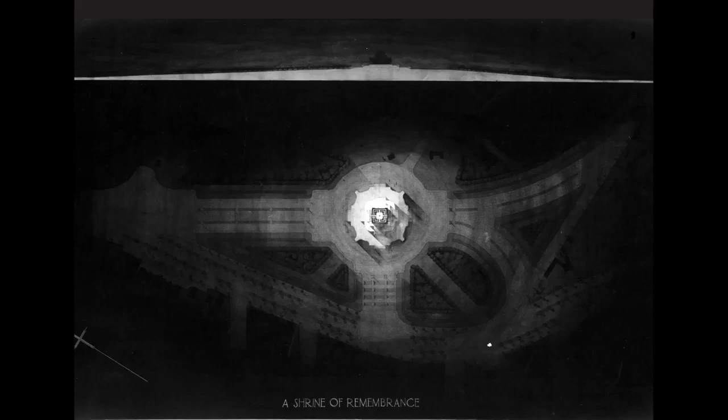Obviously, as a practice, I'm here representing a creative partnership with my partner Catherine Rush, and the collective efforts of, I've lost count, probably 60 or 70 creative individuals from right around Australia and elsewhere who have contributed to our work. Our main focus has been in the civic domain, so we don't do a lot of developer stuff. We've tried to do greenfields residential with developers and got beautifully sacked about a week ago, so not always our cup of tea. An interesting case of trying to find where your skills and expertise really lie and not trying to overstretch into areas which are a bit hard to find interesting, so a bit of a lesson for us there.

The shrine has a really fantastic design history. It was a project that a lot of people never actually wanted. It was won in competition after an initial public debate about what to do to memorialise the incredible loss that Victoria had in the First World War. And it was Sir John Monash, the great engineer, general and polymath, that was involved in supporting the competition and ultimately selecting the site on St Kilda Road. We'll talk a bit more about Monash later, but for architects and landscape architects, Monash is a fantastic figure.

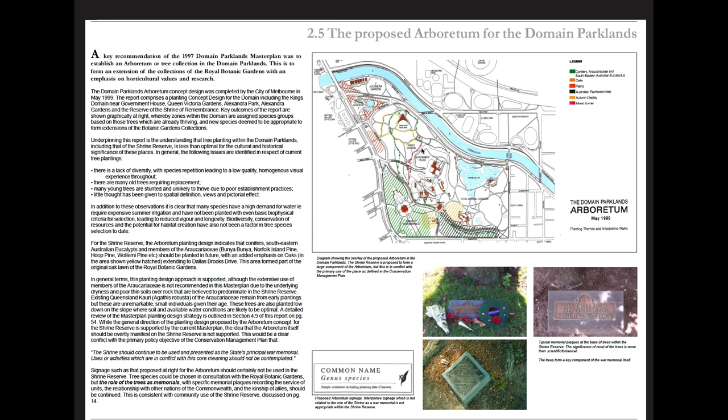Our practice was engaged with Ashton Raggatt McDougall to really work out what to do. There had been a scheme by Eggleston MacDonald to provide accommodation under the shrine building in the abandoned Undercroft, but that had not gone ahead. From a landscape point of view, the reserve had been managed essentially as an arboretum and had kind of crept into the Melbourne City Council management domain, and it was starting to move away from this great tradition of the shrine as a special place in Melbourne's civic fabric.

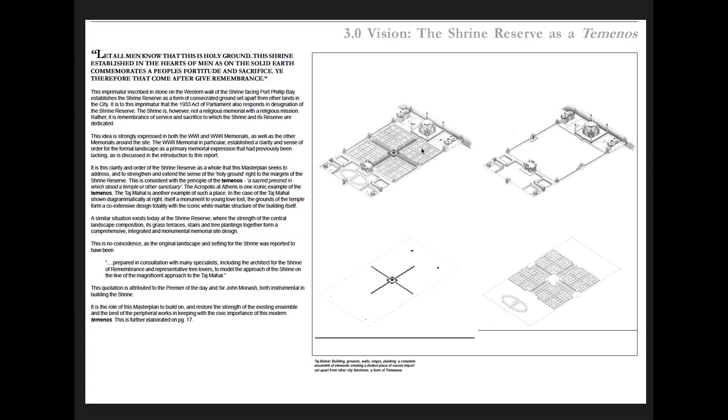That's the Sir John Monash quotation, which is inscribed in very large letters on the western wall of the shrine. So I guess working with ARM, we started to look again at the shrine and how it could be re-established within the parklands of the domain with its 11 hectare reserve. We started to think about this idea of the shrine as a form of temenos, a completely constructed world, not just a building, but all of the elements that go together to make up a kind of sacred parkland, I guess. Correct me if I'm wrong on the use of the word temenos.

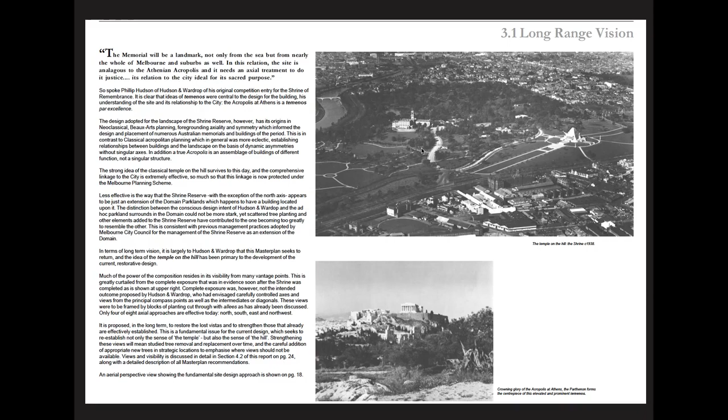And returning to this idea about the temple on the hill that was described in the early ambition of those who really founded the place, and also Hudson and Wardrop's ideas for how the shrine might sit in the city. A lot of that was really about decluttering, taking things away, and editing the tree population, 450 old and strange trees which needed management again. I think if we recall that Hudson and Wardrop drawing, it was much more around a formal, almost classical, perhaps City Beautiful approach to civic placemaking.

So we started to think again about how we could re-establish this axial landscape carved out of forests, very much in the manner of perhaps Vaux-le-Vicomte with its grandiose alleys. But that is really the essence of what we found on the site. So we started to look. I hope you can see this is right. This is an interesting review of 15 years of design representation as well. So this is one of our rather odd marker drawings of 2001, I think. It just shows some of these ideas about clearing out the alleys.

Is there a pointer? Perhaps not.

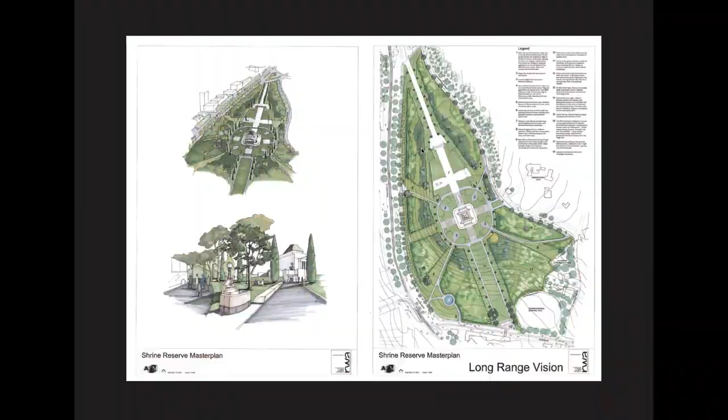Clearing out this cluttered classical framework to reveal the shrine again in an ordered, forested world. And this is all built on, I guess, slightly romantic ideas about Greece and Turkey and how we might re-establish this vision for this building. And then looking from a landscape design point of view at planting design, as we saw it, for this dry constructed ridge. So trying to analyse what was there, and this is I guess a process we invented at the time to look at, understand, and analyse this tree population on the site.

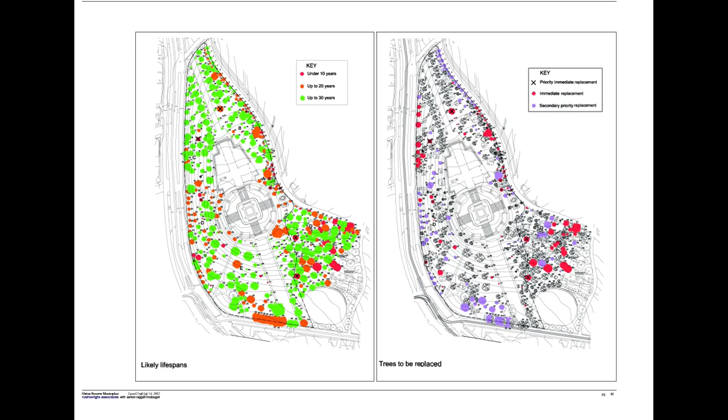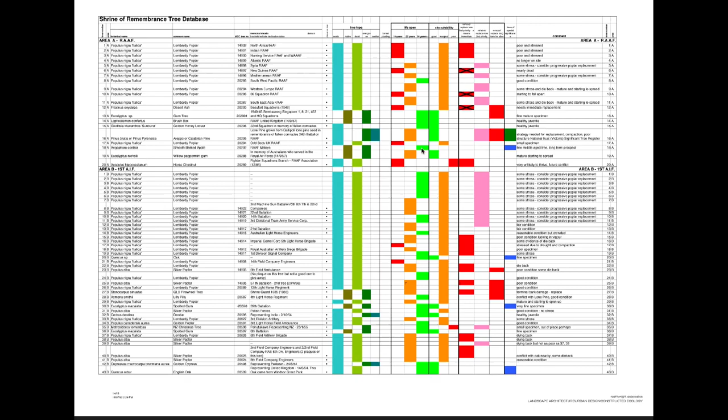So we had some basic categories to try to begin to understand these trees as a group, and then to recommend how it might end up being adjusted. And then also to look at how, with age, mismanagement, poor tree selection, and obviously climate change, what was likely to happen in the future. And at that time we found that 40% of the trees were likely to go in 10 or 15 years, and that's pretty much what's happened on the site today. So this went through this crazy Excel sieve analysis, and we'll return to the outcomes of this work a bit later on.

I think a key principle in this landscape is this idea of memorialisation. Every tree had its plaque for every unit associated with the place, and these trees become the focus for gatherings year in, year out, and it's actually this link between particular trees on the Shrine Reserve and these groups of people that brings people back year after year.

So we developed this planting mix, really pine, eucalyptus, cypress and oak, these great long-lived kind of dry survivor trees from the Mediterranean and elsewhere that would continue a lot of the design language that was already on the site and then develop a really long-lived tree population in perpetuity.

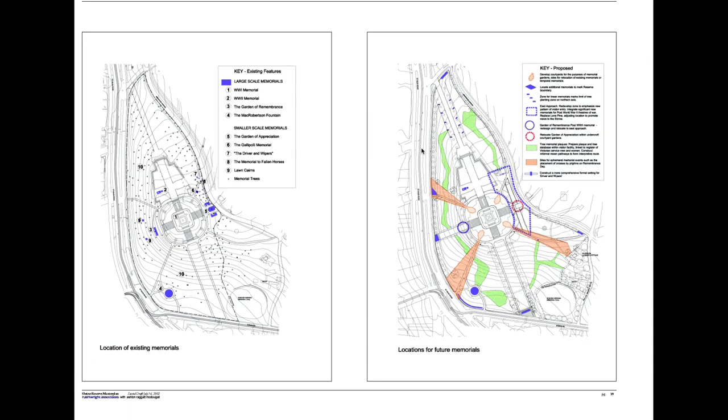Much of this work also looked at memorials. Like many sort of parkland landscapes, the place just sort of accretes stuff. People want to give stuff, donate stuff, locate things on the reserve. So there was a little bit of focus on how that might happen in the future as well, which informed the placement of other objects over the last decade or so.

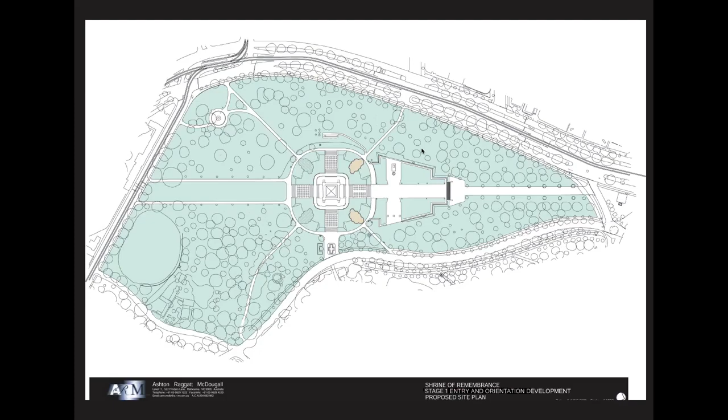I guess the main area of interest for us has been the development of the 4 courtyards on the site, where we've played a greater or lesser role. These, I guess, are the masterstroke on the site, if you will, developed by Ashton Raggatt McDougall, essentially as a response to the requirements for universal access, which we'll see.

So in 2001, it was pretty much impossible for a very ageing population of returned service people to actually get into the crypt and the sanctuary of the shrine, and that was actually almost the primary briefing criterion for what became the new visitor centre, as well as providing accommodation under the building.

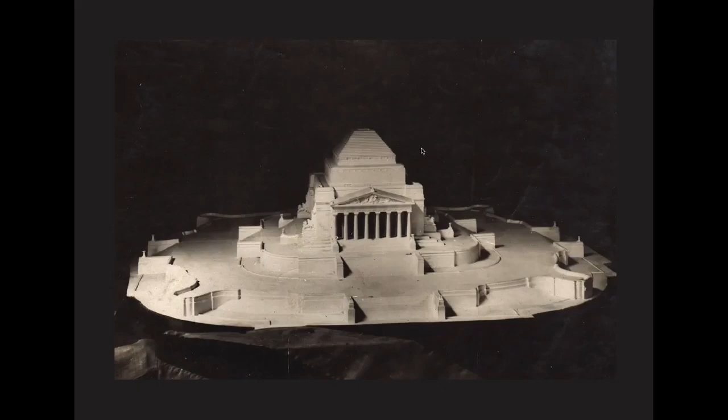So the design master planners, Neil Masterton, Ian McDougall, obviously Howard, and Tim Wright of ARM, looking again at the Hudson and Wardrop schemes, developed an approach to this building to some degree based on the original conception of Hudson and Wardrop. So in these model images of the time, you see that there's a second terrace of masonry below that upper rise, which is built on the site. And this is all sort of grassed over now.

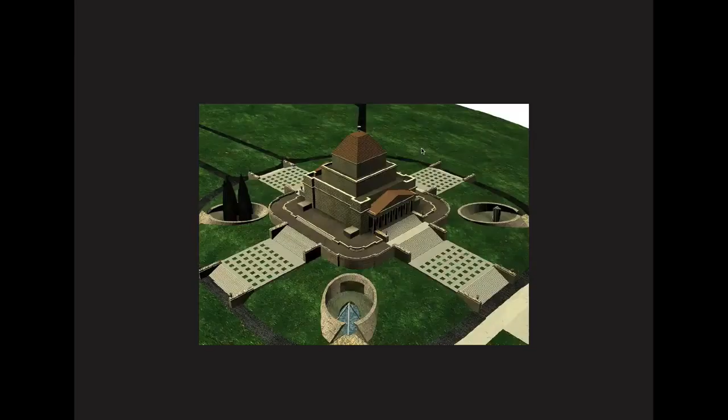So this became, I guess, a way into starting to think about a way into this building and to use the very extensive undercroft, which is the forest of columns, which I imagine some have already been to today. Opened just last November in its second stage. So this is an ARM scheme or something that didn't happen. I think we're probably fortunate it didn't happen.

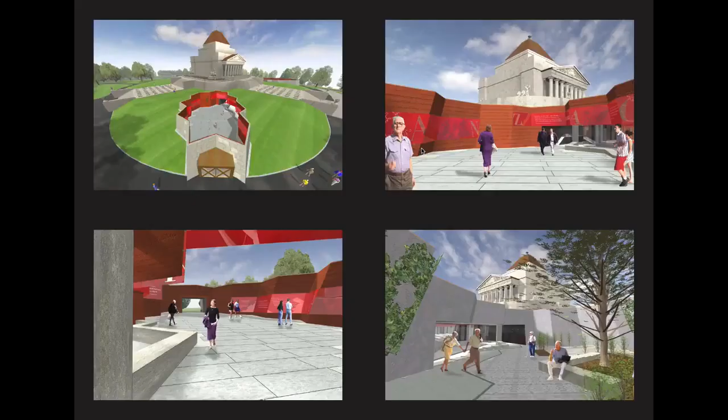These are some of the early studies of that period with ideas and tests for those courtyard interiors. And this one also talks a little bit about the courtyards as a kind of section of tube which spirals up Swanston Street.

And obviously, I think the key move is this idea about a very gentle 1 in 20 incline. I think just in their section there you can see east and west, that incline down into the undercroft space. So the light brown is the courtyards, obviously, and then the yellow is the accommodation, admin, office, visitor centre, and then the disabled access to the crypt.

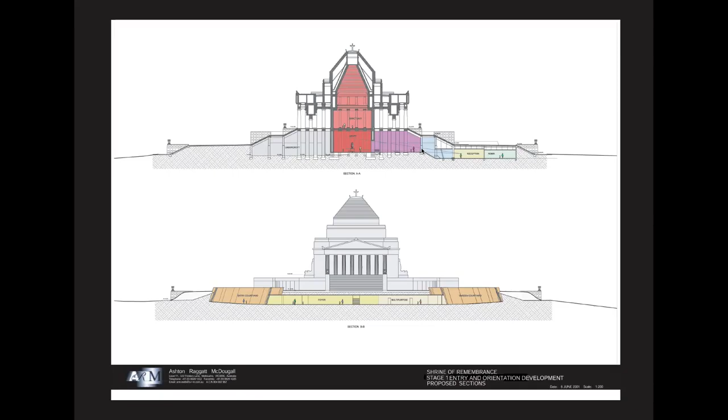So that apparently simple move, I guess, cracked the nut in this particular case. These courtyard forms are faceted and to be executed in precast and in situ concrete. And you can see there providing that graded access down into the undercroft. And on that drawing you can see the column field, which has just recently been fitted out for exhibition display, back of house and admin.

This all seemed very challenging at the time. So Ian, just after a media launch, convincing the trustees of what was about to happen. You can obviously see the look on some of their faces, being a bit worried about perhaps the scale and enormity of the change that was about to happen to a building which hadn't really been adjusted since 1934. But obviously a brilliant sort of esquisse and partie for the entry to the building.

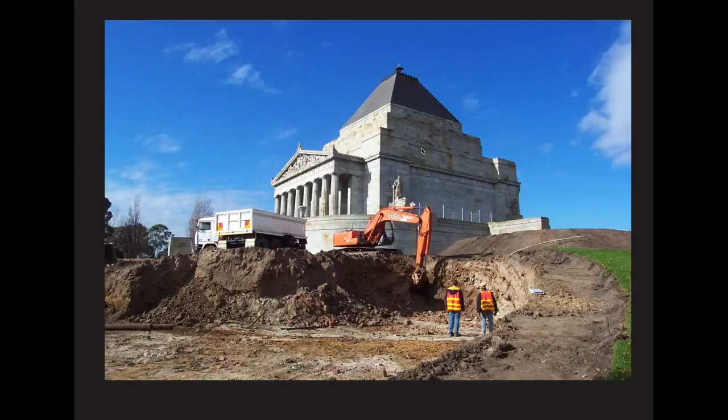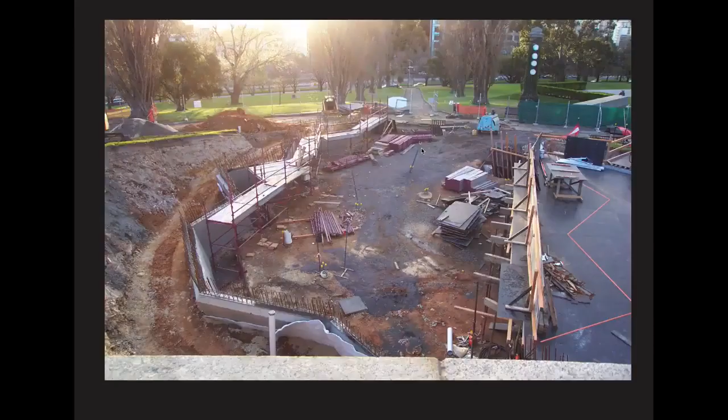And obviously some very major adjustments happened along the way. Kind of industrial scale archaeology happened, revealing huge areas of uncontrolled fill, contaminated fill, and the full range of construction problems of the time. So these are images of that construction sequence and the northwest courtyard coming out of the ground. That accommodation below a propped stair, and then the access out to the right-hand side of that slide, out to the courtyard entry.

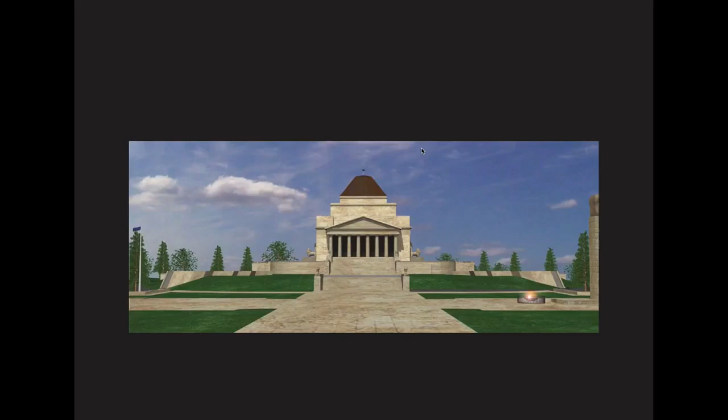I think this was perhaps only possible because of the order and simplicity of this front elevation, which I think is quite brilliant. Those folded walls at once buttressing and stabilising the building in the landscape, and then providing this completely respectful granite frame, I suppose, for the walls within, and these different courtyard worlds that have emerged on the site.

The landscape development of the courtyards, I guess, began with an approach to the building as the World War I memorial. So we started to think about what was involved in the Gallipoli landings, the landscape colours, the sense of what was there in the landscape, and then also ideas about the bunkers, what it was like to be below grade, and how you might be able to create something for today which had a sense of antiquity about it, and a sense of being able to age. So these are some of the images of that period in the design process.

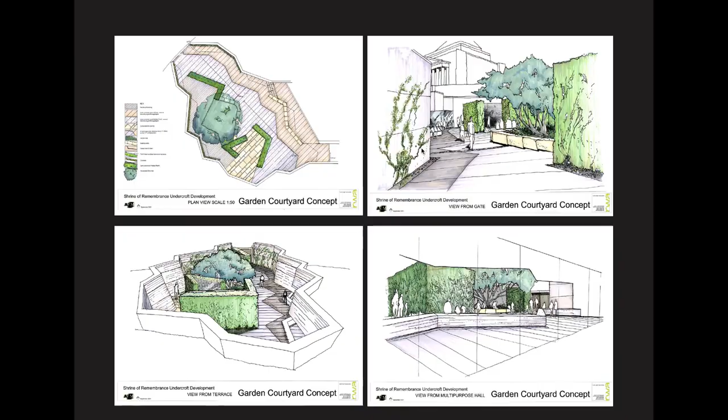These are some of the sketch studies at the time, dealing with the need for a 1 in 20 loading bay, coming down through the body of the courtyard and into the doorway there, and the big tree on the right. Construction drawing showing this central space, and these fragments and shards of landscape material. I guess a plan of considerable energy, and the line on the north side there, a line created out of the shadow of the northern wall on the 11th of November at 11 a.m., the day that the armistice was signed.

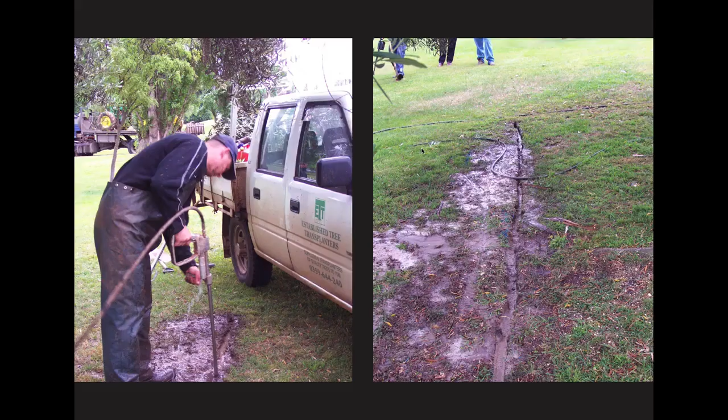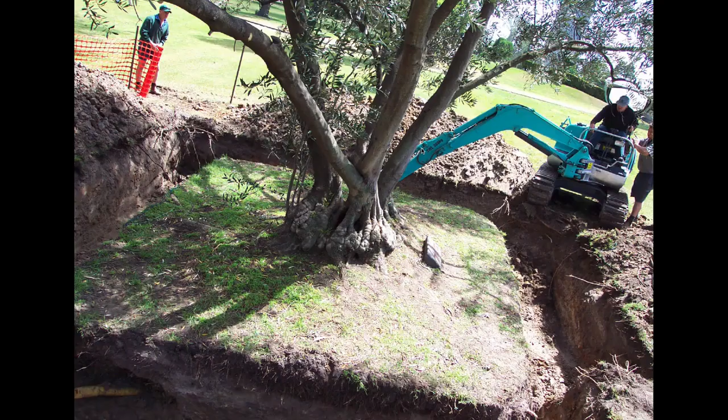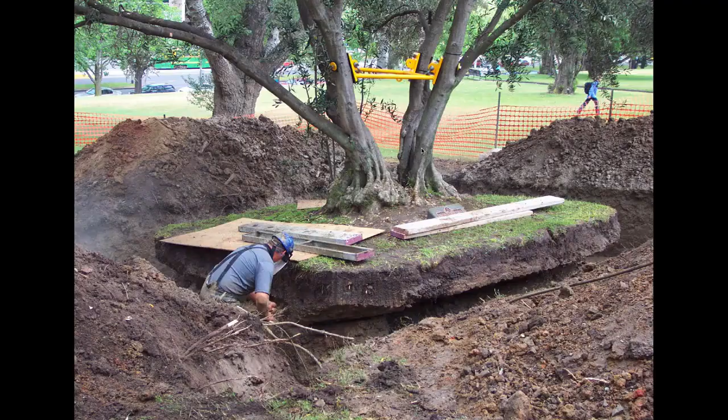And then we looked at moving this big olive tree, which is always great fun. These slides, for those who are interested, show some of the work involved in doing that. It was a 5 by 6 metre root ball, then water jet cutting in on two sides at 6 monthly intervals, so that the roots had a chance to grow back, and then trenching around it to create this fibrous root ball. The trunk was then bolted together with a custom-made steel frame, so through each of the trunks we bolted through to get a lifting attachment, and then it was undercut progressively and eased out of the ground from above with a hydraulic crane.

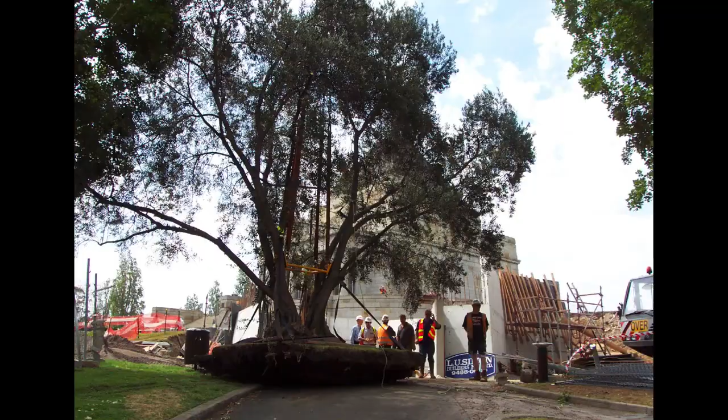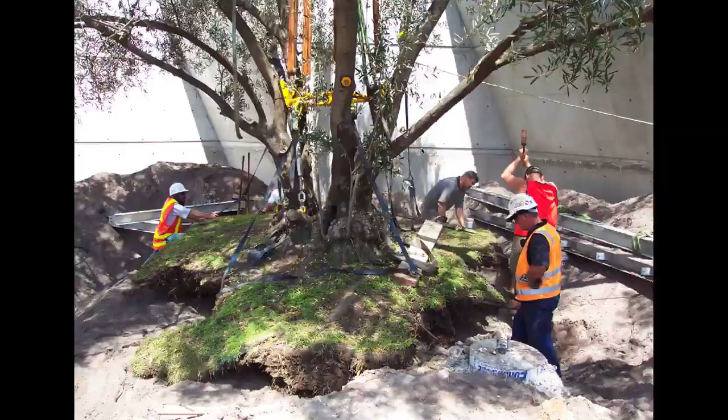And there we see a classic demonstration of the lack of taproots of trees for those who are technically minded. Most trees don't occupy much more than about the top 500 mil of soil, and this was especially true on this site where the council have been watering since about 1973 for 15 minutes every night. So it was a bit of a surprise to see this root ball come up with just 300 or 400 mil. A somewhat nerve-wracking and risky enterprise this was. As it was lifted, bits of the root ball started to peel away and drop off, much to the amusement of the 3 television news crews recording it all in minute detail. And there it is going in. A great way to start this project off.

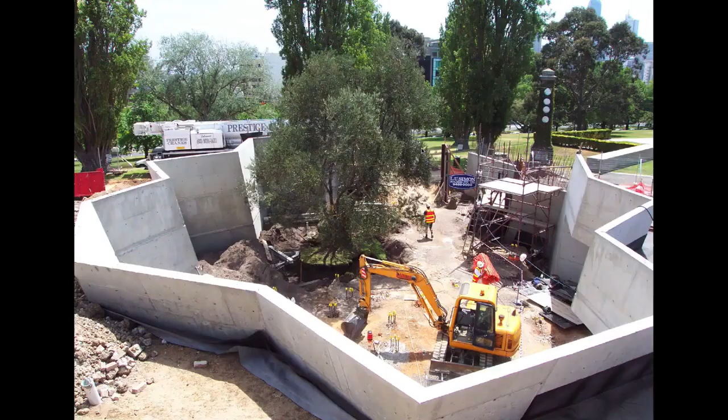Obviously a very imperfect tree, and we selected this tree primarily for its ability to transplant. They've been transplanted like this for thousands of years, and will grow for hundreds of years thereafter. There are olive trees in Europe and North Africa known to be thousands of years old. And this one, you've seen in those images just how craggy and distressed, almost damaged, perhaps even blown up this was. So this gave us this fantastic initial character, and chimed in perfectly with an aesthetic around remembrance, longevity, age, dealing with Asia Minor, the plants of the Dardanelles. All these things came together in this olive tree, if you believe the story.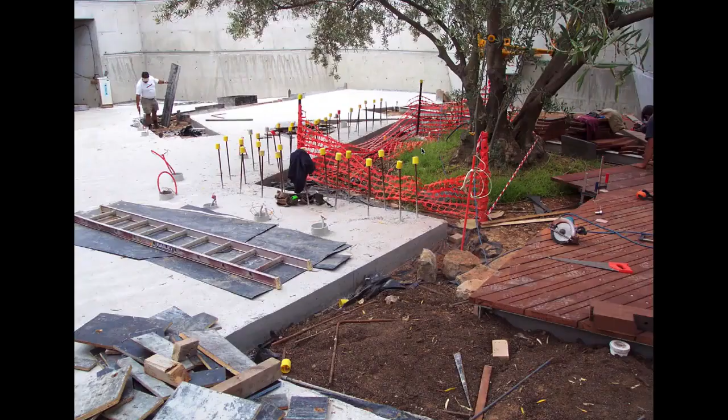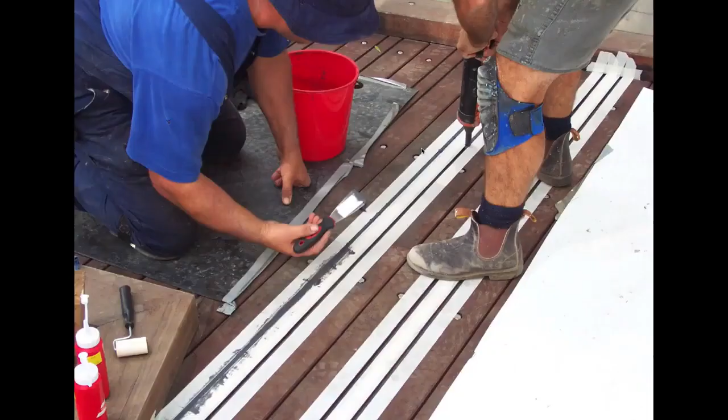Obviously, a big tree like that drives the technical issue of keeping a porous medium above the root ball. So this is all decked around. We designed this big timber wharf deck, really. Drove the builders completely crazy doing this. We've used this again since. It's a routed carborundum strip, 10 by 10, routed in to give us slip resistance, so those black lines going across, and then countersunk stainless steel coach screws at 600 centres doubled up, so you end up with something like 8,000 coach screws in each deck. That certainly keeps the carpenters busy, a lot of hand labour, but you end up with this fantastic surface of intricate crafted detail, a long way away from those bugle screws and all that stuff you inevitably see in decking, from which the decking inevitably seems to craze away. So this was an idea about a maritime wharf deck, and then just some snaps of the concrete formwork.

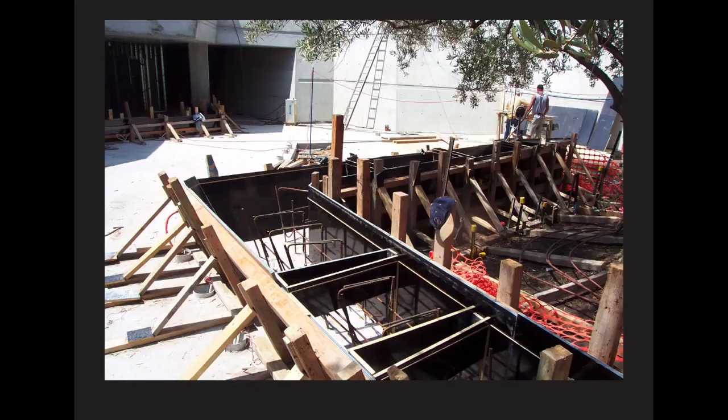Another risk here in just keeping the tree alive through construction. Some of our rebates and set downs in that concrete are all, I guess, consciously designed around firing lines, revetments, military items and the like.

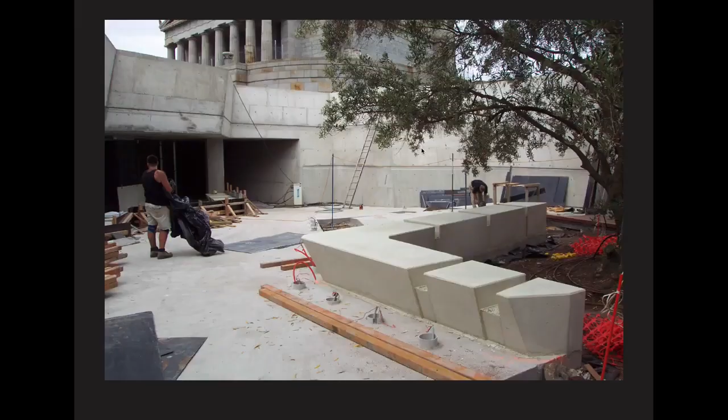And also, I guess, in the back of our mind, the idea about a ruin, and again, some thoughts around, this is actually one of the theatres at Priene in Asia Minor, this giant-sized marbles and ruins of Europe. And just some snaps of trees going. I thought it might be instructive just to look at sort of growth over time.

I think, as you'll see, perhaps one thing that differentiates landscape architecture from architecture is this thing that it improves with age. And I think from a practice point of view, it's something that we've thought about quite a lot. Will what you put in actually improve, or will it kind of fade and get really ugly and scratched and horrible? And maybe that's what differentiates, at sort of a primary level, the difference between landscape and architecture.

I'm not sure. I think architecture is installed; occasionally, it weathers gracefully. Does it improve with time? Is really open to question. It's always interesting to see the heroic architectural photo. It's taken the moment the dust has been cleaned away from the pavements, and really the design intention doesn't really come to the fore until much later.

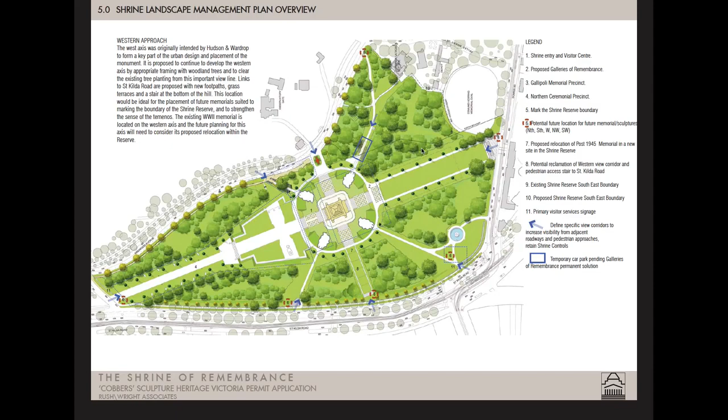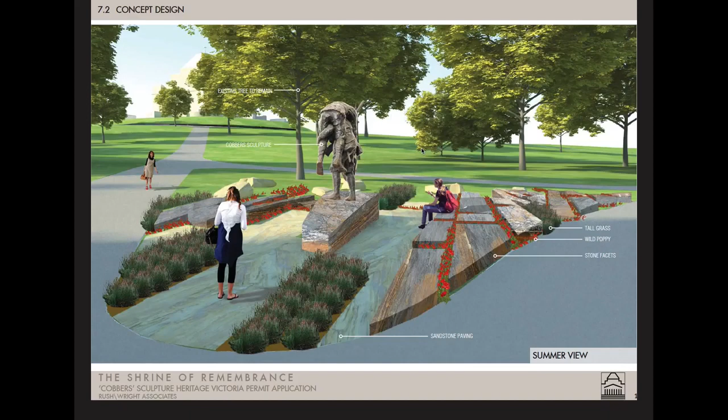This steps through now to about 2007-8. The master plan is kind of in full swing, and this scheme for the placement of Peter Corlett's Cobbers sculpture came across the drawing boards, and these are some early concept ideas for that. So the figure itself is the second casting of Peter Corlett's Cobbers sculpture, which was constructed in the Western Front in France to commemorate the Battle of Fromelles in July 1916.

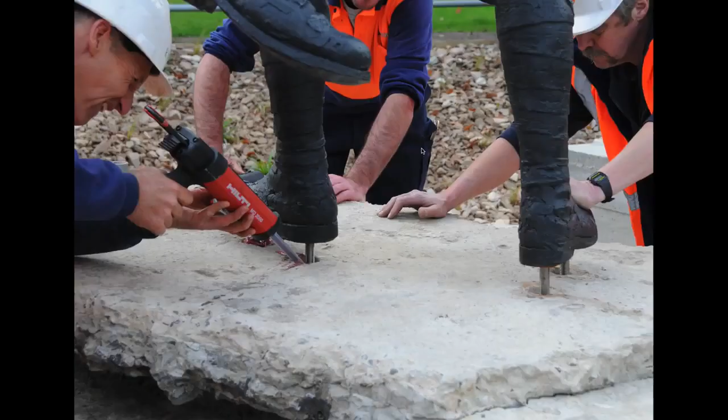Later, we actually selected these from the West Melbourne Power Station site on Spencer Street that was being demolished. Found that there were these fantastic floor slabs available, and had them brought down by Guilfoyles, the wreckers, onto the site. And interestingly enough, we later found out that it was Sir John Monash's office who had specified this concrete. So here we have a kind of recovered relic of a Monash scheme brought down and used on the Shrine Reserve. So pretty interesting to find that out.

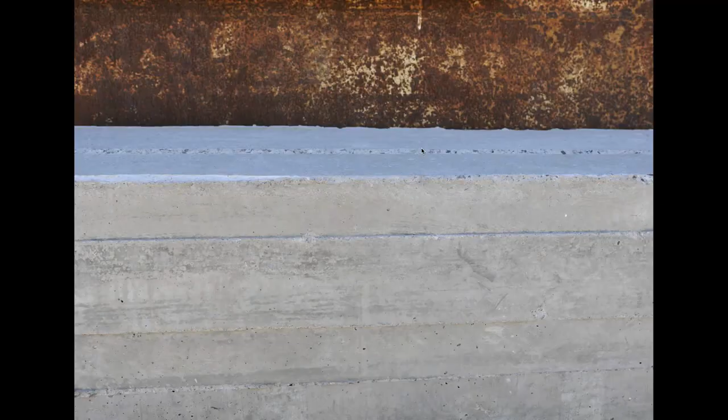Some of the details and signage, which we'll touch on a bit later. This is sort of interesting in this sign, but it recurs in one of the later courtyards. This idea around using recovered materials: it's actually just a giant piece of road plate. You might see these in excavations in the road, and this sign was actually just created from the recovery of one of those pre-rusted forms and cantilevered off this beton brut sort of foundation course, through to 2009 there.

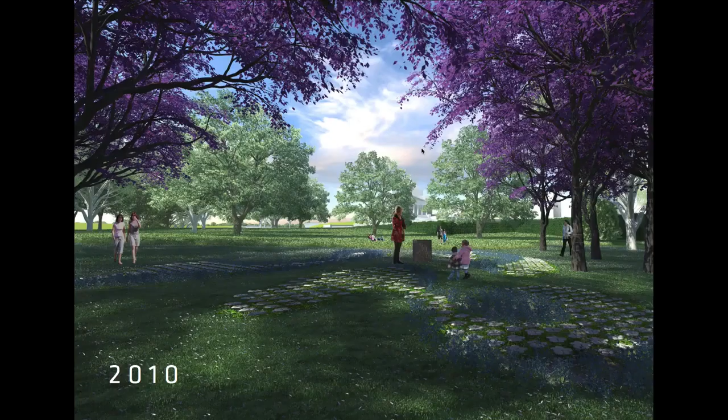Around this time, we were also involved in helping Catherine Rickaris, landscape architect, to visualise the Women's Service Memorial on the Shrine Reserve, and these are just some renders of that. A kind of step forward into a different form of representation, and a crazily high-res render. And by now, these are actually individual blades of grass. I think there's something like 5 million in a scene. So we're very happy with this, with the colour and light rendition. And a really interesting moment in terms of design representation where 10 years on, so much had changed in terms of design practice right through the industry.

More on memorials, just a little bit of a look at the Gallipoli Memorial. Again, forming part of that idea around making the edge of the reserve.

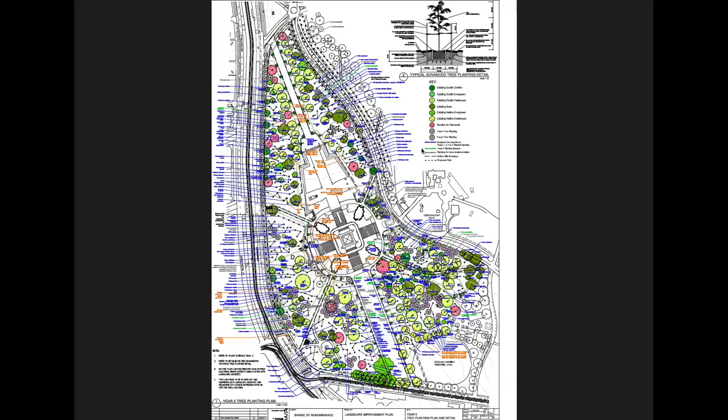And then looking at the trees, by about 2009, Melbourne had its worst drought for a very long time, and the population of trees on the reserve had definitely started to show its age. And at about then, we began the process of really closely assessing what to do, and this has been a process of a yearly assessment on site, and then working with the original ideas of the master plan to replant the reserve comprehensively with that original conception of the species mix of cypress, eucalyptus, oak and pine as a kind of backbone planting. So you can see all the little dots on the drawing, the new trees year by year, and it gives you an indication of the way in which one of these old tree populations just needs refreshment, a bit like a crop. They're there today, but eventually they'll be gone.

So we try to look at the way in which time will influence a big tree population like this. And to be honest, getting these trees refreshed has been one of the most satisfying parts of this particular project, and working out ways to group and get these things going. It sounds like a kind of simple victory, but the levels of bureaucracy involved are challenging, and all the establishment practices needed in these old compacted grasslands have required a lot of scrutiny. And fantastic, we're now starting to see things like stone pines and these fantastic old cedars and oaks and so forth, which are going to grow out to form a new kind of urban forest.

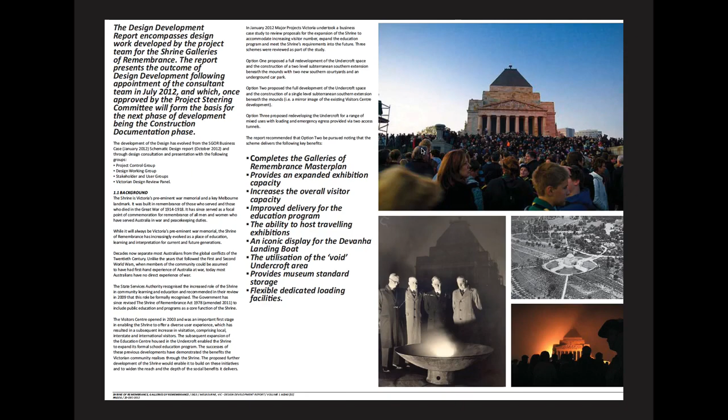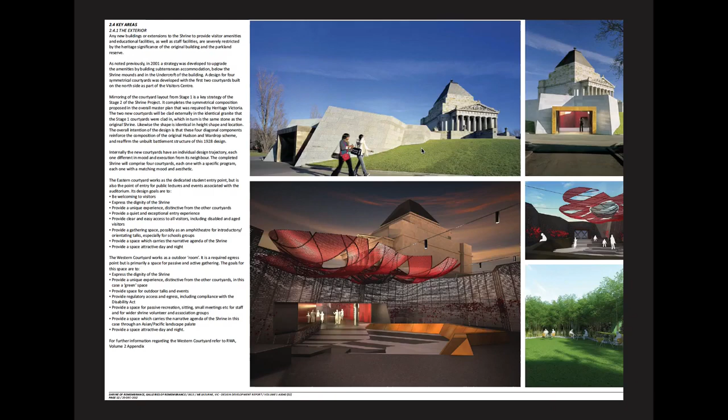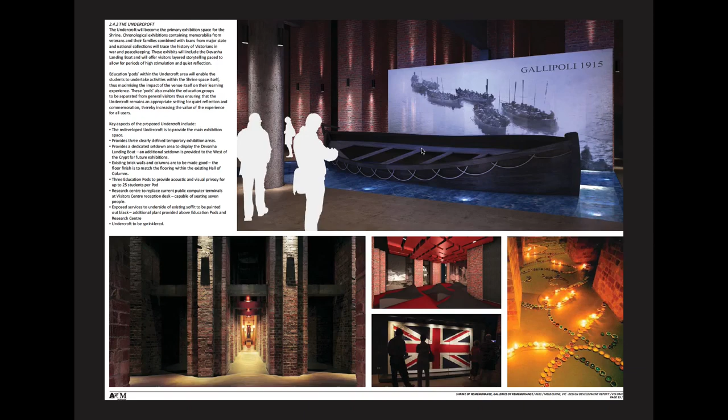Stepping forward to the recent stage 2 component of the work at the Shrine courtyards. These are some recent slides about that, which has really been the addition of 2 courtyards on the south and the major galleries development, which has brought exhibition and display to the Shrine in a way that hasn't been there previously. So there are real highlights in these galleries, including the Gallipoli boat. It's one of the original landing boats, which has been brought into the Undercroft zone, and it is quite an incredible display of these World War I artefacts.

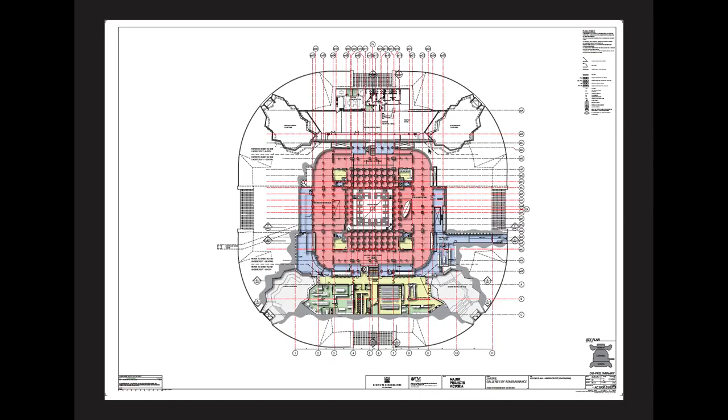And the courtyards again, ultimately, I think it was a condition of the original heritage permit that the scheme would end up being symmetrical about each axis. So it was a very good permit to get because it meant that the second stage just had to happen at some point.

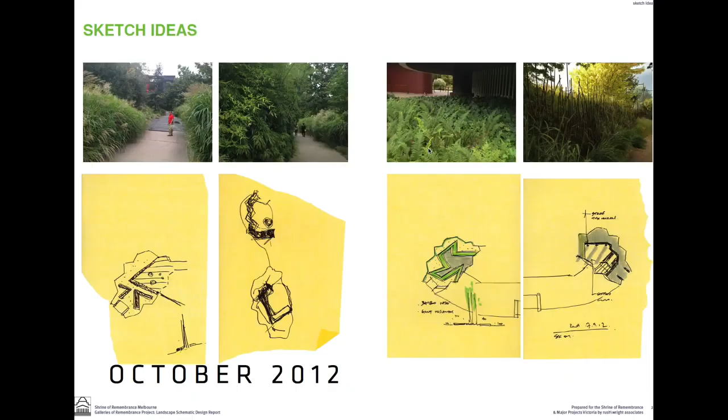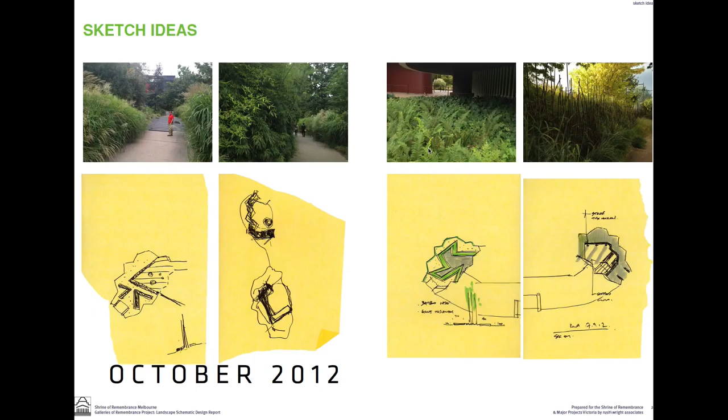And these are some early schemes for those 4 courtyards. The original idea for the courtyards was all different. On the northwest, we have the olive tree garden courtyard. On the northeast, that dramatic entry. On the southeast, a brief for a schools entry courtyard, and then on the southwest, more of a green staff retreat, and some hilarious cartoons of that time.

And working again with Ian McDougall, we were looking at some idea about how to represent the history and service of Australians in the Pacific. And movies like The Thin Red Line were definitely on our mind, with the sort of horrible kind of tropical savanna grasslands as a feature, and then the potential use of bamboo. So we've basically pursued this scheme for the southwest using those principles.

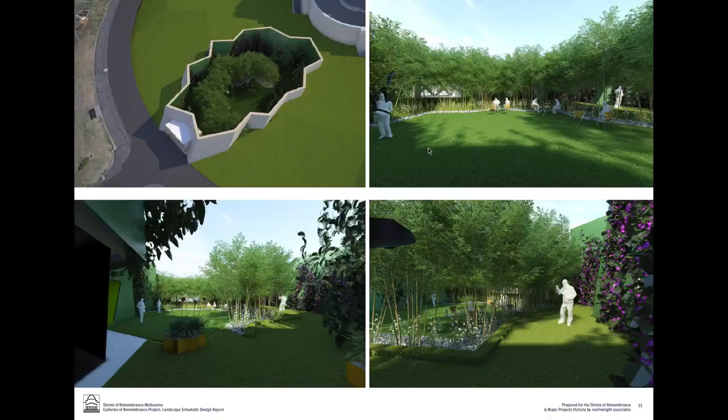And it became this, it just kept on trying to cover everything in grass for some reason. So we had this big green sward and this sort of strange, wild, woolly bamboo grass around the edge. There are a lot of ways to do that. Miscanthus sinensis giganteus, some of the other tropical bamboos, and had a really good look at the potential microclimate in there and how it might figure in the landscape there.

And unfortunately, not many people were happy with this scheme, and we were essentially asked to revisit it, which does happen from time to time. And we started to look at a new client brief, one using all natural materials and these principles established up there, and returning to some ideas that we'd explored to some degree in the northwest, and then looking at how we might begin to talk to the idea of the Pacific region as a battle zone, and started to work with these themes.

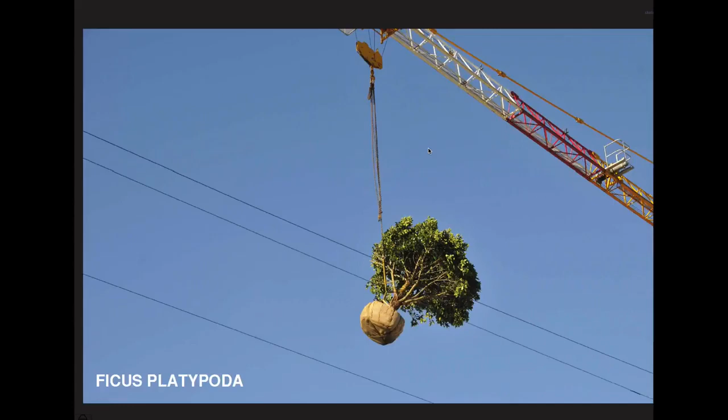Again, trying to look at a way in which a tree could form a primary design idea, and then the rest would follow from that. So these are, I guess, reference ideas from that period. Very strongly interested in this idea of a giant strangler fig, and then how we might actually achieve that in this courtyard.

So we actually end up finding a suitable tree in the nursery. So this is a Ficus platypoda, Port Jackson fig. Itself another kind of crazy remnant in a nursery. Have these fantastic double trunks and aerial roots and impossible branching habit, never to be used in any proper kind of street landscape or anything like that. So an ideal candidate for us, and this was later on installed in the project. And trying to bring in this idea of the tropics into this landscape proposal.

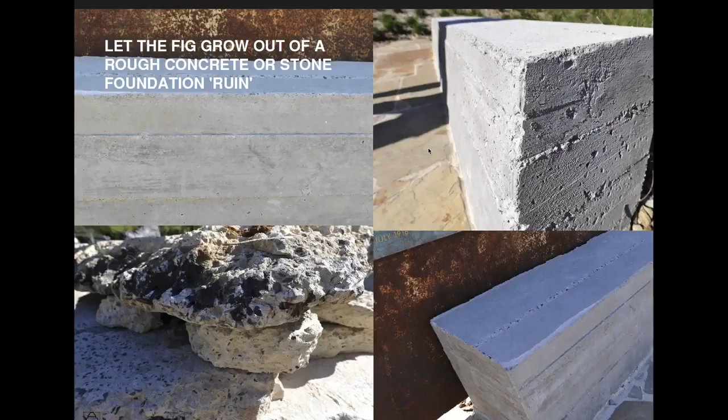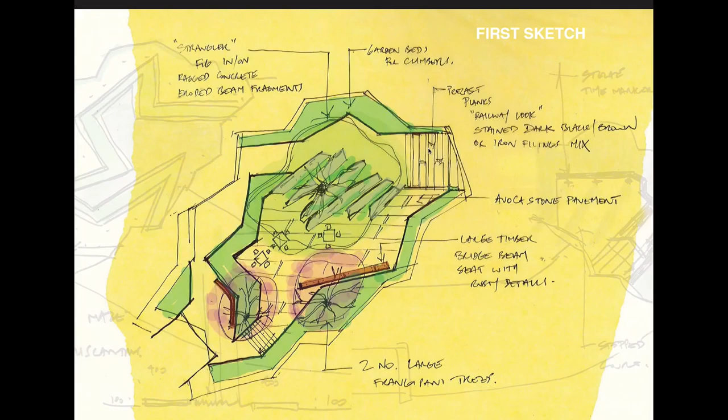And this was one of our very quick sketches, I guess, used to try and capture some of these ideas. So the planning is similar to the other courtyards. One large central open space, and then the need to come up at 1 in 21 around the back there. So that was a very common theme within these schemes.

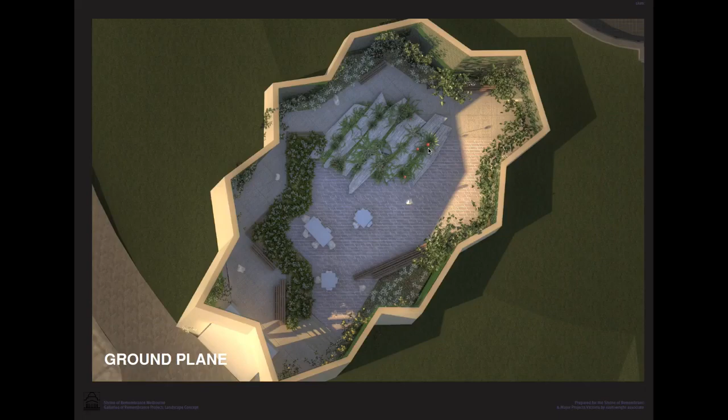And then some renders of the time, just trying to explore this idea again about placing the big tree in the courtyard, and then how to, I guess, work around it and integrate it. And in this case, almost suppress it. And here we see these large concrete plinth forms underneath, essentially designed to suppress the tree and try to keep it small, encourage aerial roots, and then the whole surrounded underneath with a 1,200 deep concrete wall. So we actually built this big concrete bucket.

The ground plane render. You can see here we're reprising these concrete plinth shapes with plants kind of coming up in between. Not quite sure where they came from, really. Possibly bunker foundations. The builders christened them the concrete coffins, which was interesting. And just the details for those. I think you can just see there at the top left, these really deep concrete restraint walls to try and restrain this tree, essentially turn it into a large bonsai.

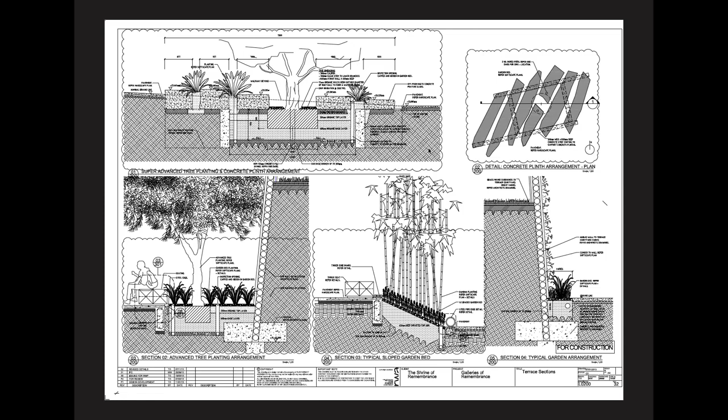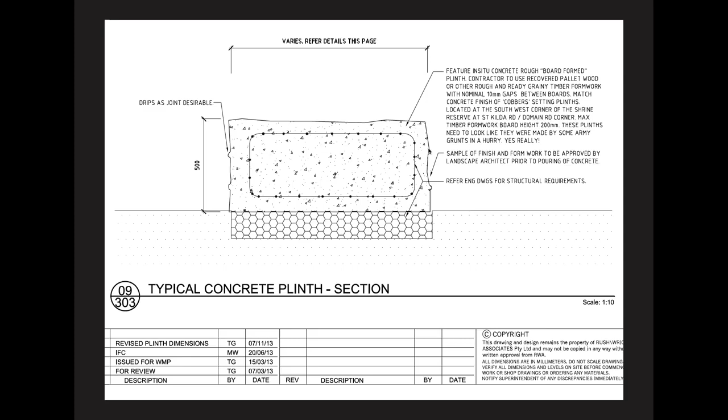On the top right, the plinths coming across that foundation formation, and then just quite simply detailed as a set of in situ forms. And then a favourite drawing note about how to achieve this concrete. Believe it or not, it's quite hard to achieve something that is rough and ready. It takes a lot of energy. Everyone wants to make everything completely blemish-free and seamless and perfect and pure and all of those things. I think the builders were quite relieved to find a way to do these things kind of crudely. They're still perhaps a little bit smooth.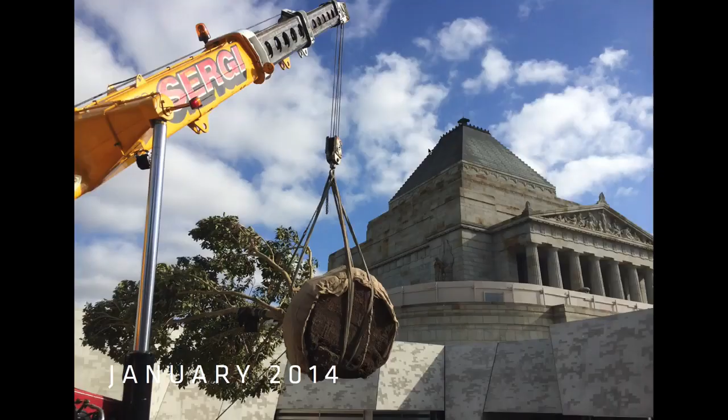And these are some recent shots of that and some of the construction sequence. Moving in the tree, rotating on the crane, and then building these things around it and trying to look after it on the way through.

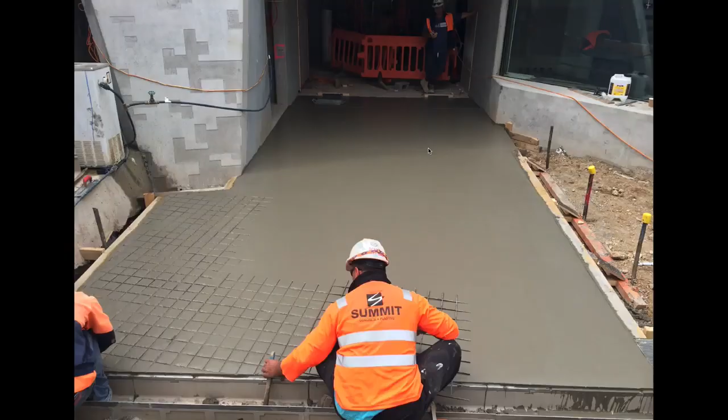So these plinth forms gave us, I guess, another form of ruin again, and gave us a lot of horticultural challenges. The pavement hasn't been done for a while. This is actually a form of concrete you might have seen around city streets. It was once much favoured by council engineers for driveways, and we were really keen to find something that looked as if the Army Corps of Engineers had been out with a steel mesh or something and just decided to make

this happen. It was ultimately achieved with a whole range of trials, done in the past by cast iron pit lids with those grids on them essentially being dropped onto the wet concrete and then moved every time, so the concreters would have a couple of these as they moved between them, trampling them down. So this was a modified version of this, perhaps brought into the modern OH&S environment, and they had a lot of little issues with this technique, but eventually got it down.

And we documented really casual grid alignments around the construction joints and so on, essentially to get an idea about the provisional or the ready-made or the very quick response, and it was a bit of a leap of faith, I guess, to look at a pavement like that. And here we have our coffins starting to grow in with a very intense, I must say, subtropical landscape brought in around it.

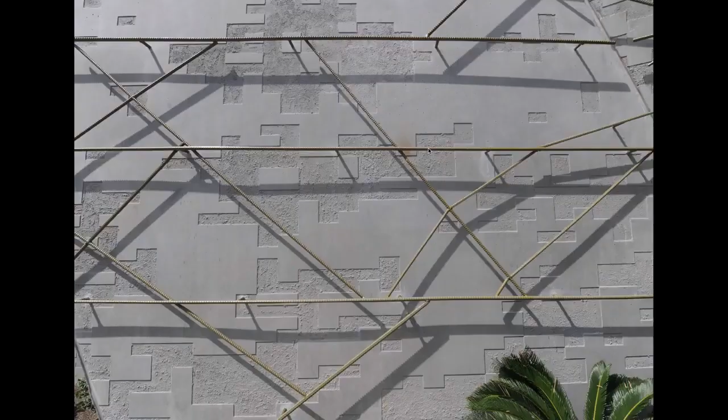I really like these plinths, obviously. A simple idea that seems to be doing something; they actually provide a gentle level change, seating, a bit of spatial definition. The wall climbers are growing from pinned reinforcing rods, so it's just a deformed bar, that crazy stuff in reinforced concrete with little ribs all over it. So that was the ARM/Wright idea about netting or a logic of incarceration, iron bars wrapping

around the walls. Fantastic tree, Ceiba speciosa, with its personnel-destroying spines. Howea forsteriana as an understory palm, and these crazy wall climbers. And then our brutally detailed rusting steel seats, executed in mild steel on recovered wharf timber. Very simple to do. The view from the office, and then some recent shots looking at some of that plant growth.

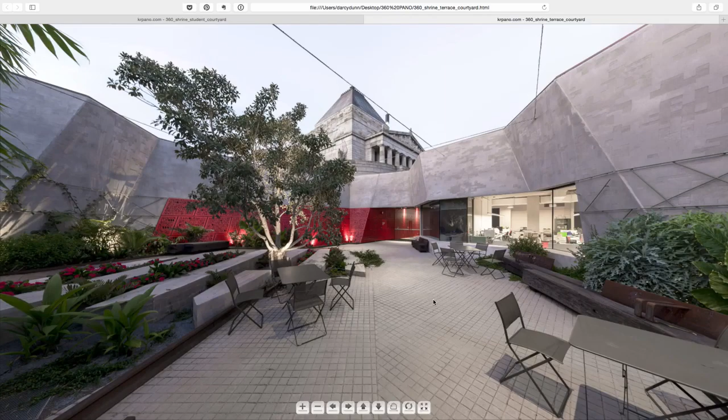And if I can get this to work, I think I can, with four fingers slide across and look around. This is a look-around panorama prepared by Chris Erskine in our office, which hopefully will give you a bit of a sense, if you haven't been there, of this scheme. Those rails, these rustic seats, over in the corner there a rusty pipe, apparently a buried service, but actually created for its job there as a garden edge.

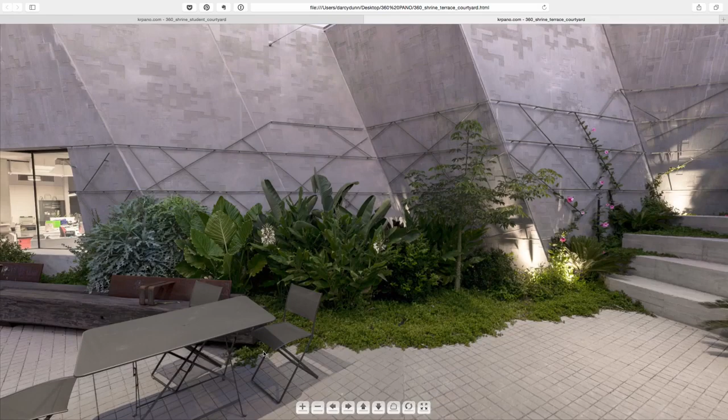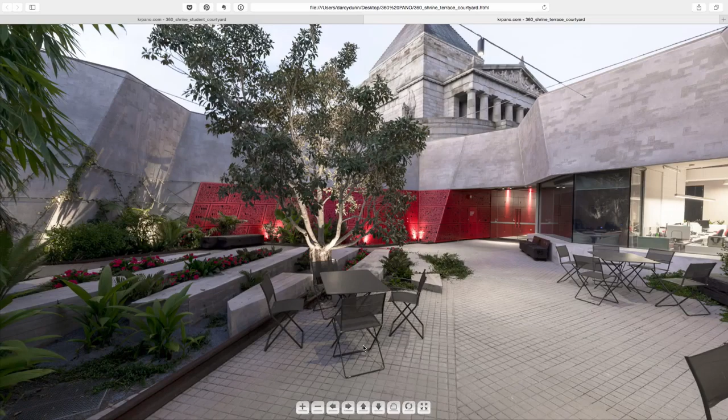The grid concrete, and then ground cover and other plants designed to come right across. So this is a fantastic succulent carpet that's going to come right across. And then later additions of what we called air-portable furniture, so lightweight stuff that might have been brought in or parachuted in to fit this military bunker theme. Just going to swipe that. How about that? Growing like berko, as Jeremy Stewart of ARM portrays it.

And hopefully came that idea of a ruined bunker that eventually will be overcome with vegetation. Not so sure about the pink flowers. They seem to belong to that genre of garden making like the little guy in the temple who seems to live there and has tended the place for decades. But they've literally not stopped flowering. It's a fantastic plant called Euphorbia 'Lipstick Pink'. If you want something to flower perpetually and drive you crazy, I can highly recommend it.

But it's been a big hit with visitors. And just some more shots of that. The climbers going berko, as Jeremy puts it. These big tropical leaves.

Planting sketch. Obviously got a lot of interest in as many species as possible. Then on the other side, a very different approach again, the school's entry courtyard. You can see there in that schematic render an idea about a small, I guess it's an amphitheatre, created to address small school groups as they come in. They enter into an auditorium, it's an orientation space, and then up into the galleries.

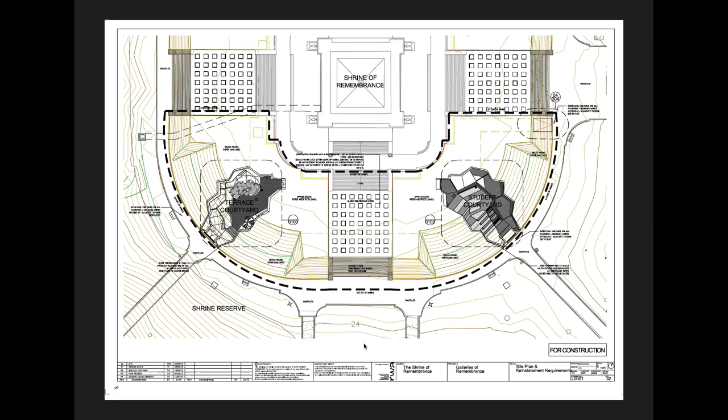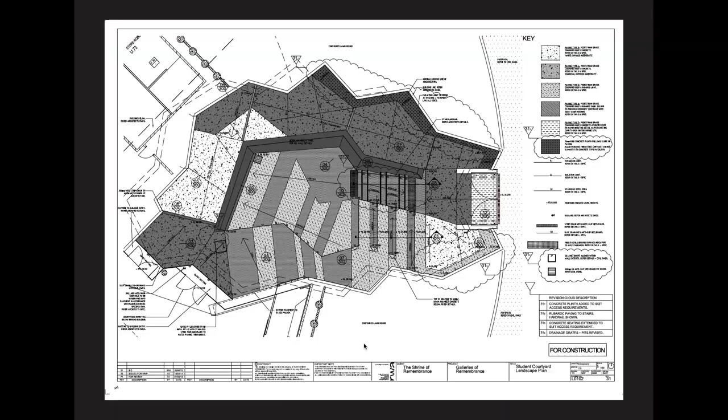Now this scheme arose as a response to that brief, and also, again, a landscape essentially to be designed without plants, to give very strong contrast. So we have the bright red entry courtyard, the garden courtyard, this sort of tropical bunker, and then the southeastern courtyard designed with this very distinctive pattern, actually based on some of the razzle-dazzle camouflage patterns of the period. And some of those, we're probably thankful that ARM didn't see. Quite amazing attempts to essentially disguise the shape of the object in question.

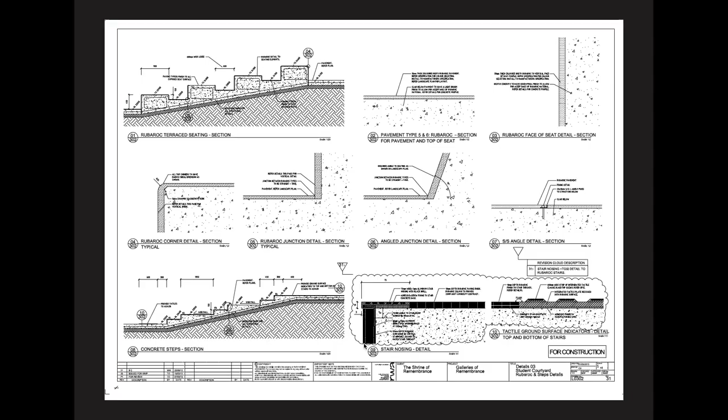We worked on this, brought the idea of using Rubaroc. So as you enter this courtyard, there's a kind of acoustic dampening effect created by this sort of soft surface underneath. And these are some early shots of that finished project. The Rubaroc, just for the technically minded, has this period where it stays a little bit light brown, and UV light eventually burns that off to its true colour. So back in October, it still hadn't gone through the full period of summer, so it's still kind of being seasoned in.

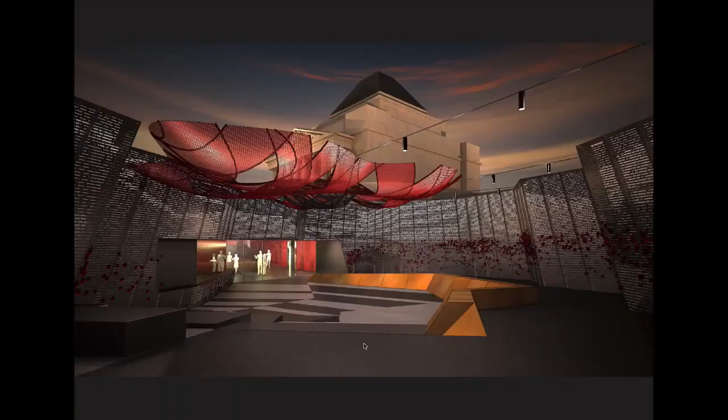These are shots from there with these amazing black walls, and this interior which will eventually be sapped completely of colour. So it'll go back to that white and charcoal. I'm not quite sure what this is all about in a design term. Perhaps a stealth fighter or something like that, but sort of inscrutably sombre and severe. And with these amazing walls, with actually the map of the world inscribed in dots.

All, I guess, fantastically enlivened by the arrival of this amazing poppy, a shade structure that emerged out of the joint design process, executed by ARM in perforated metal, and hung to shade this new courtyard. I think, again, a fantastic use of colour to really animate what would otherwise be a very, very severe scheme.

I've got one more look around. Up tab, thank you. Not usually using a Macintosh.

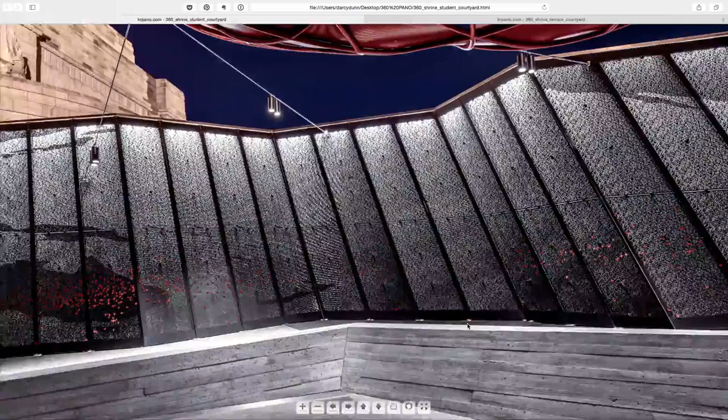Other one? Thank you. And this again is another Chris Erskine panorama view at night, and you can see here that map of the world coming around in the lighting. Beautiful lighting designed by Electrolight, very simply executed just by placing a single LED strip light at the top there and backlighting these perforated walls. And we start to get a sense of... I'd love to know how many actual holes there are in these things.

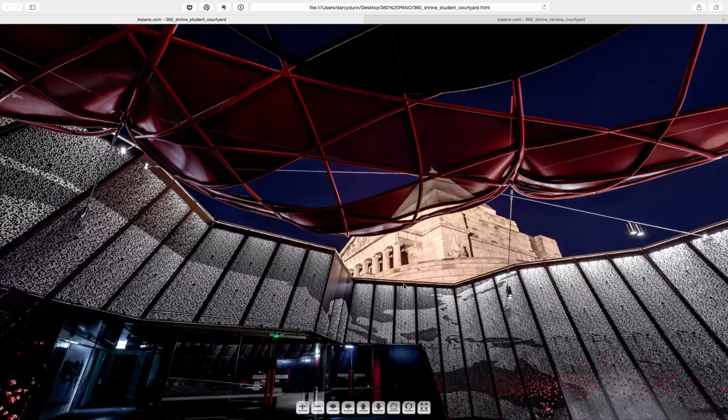And then the poppy overhead, perhaps one of the most convincing demonstrations of art for architecture without artists that there has been, I think, and obviously going to attract a lot of attention for them. And those step platforms, while they may look harsh in the scheme, are covered in this interesting sort of soft rubber. So you have a reading of this as a sort of brutal space, but then when you actually get in, it's sort of strangely soft, tactile, and kind of hushed.

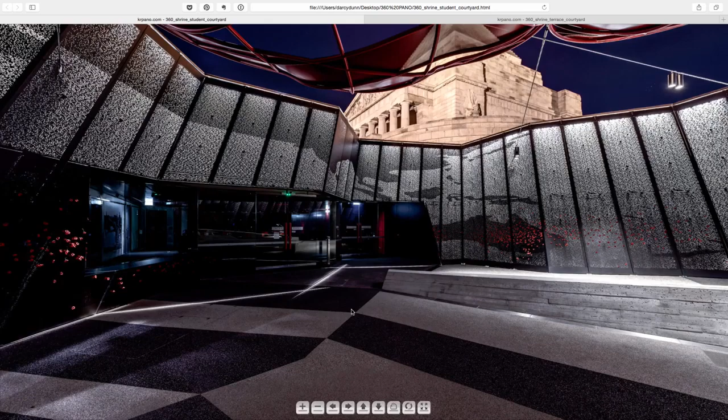And the lighting here is truly fantastic, and we had absolutely nothing to do with it. Really, really great. Really worth just poking your head in the door there of an evening just to see that, I think. That's pretty much it, I think. A little bit of insight into the reserve at the Shrine from the master plan, through a bunch of details, some ideas about landscape construction.

You'll notice we haven't really referred to particular products or things you can buy from a factory. I think a lot of our interest is in what we can do as designers to actually craft unique details, work with concrete, timber, steel, to make things that are new and distinctive. Because a lot of design these days seems to be about specifying particular material, and I think if you can really start with a strong idea and then work out how to achieve it, that's a very strong way to travel.